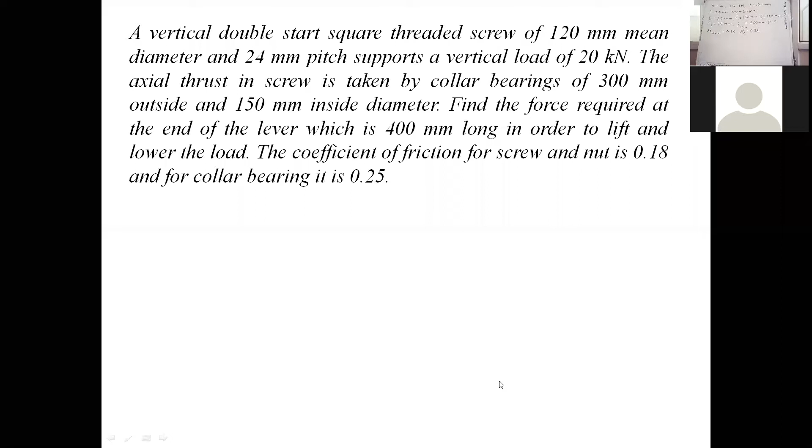So this is the statement of the problem. Now based on this, we'll try to find the force required at the end of the lever, so the effort. Whatever given data is there, I have written it on the board. Let me stop this sharing and go to the board.

So in front of you, you'll find the data. Can you able to see this? Yes, sir.

In front of you, the statement is: a vertical double start square thread, that's why we have written n equal to 2. Mean diameter is 120 mm, 24 mm pitch is given, W is the load 20 kilonewton, D1 is 300 mm, so the collar dimensions are given.

So D1 is 300, that means R1 is 150 mm. D2 is 150 mm, that means the inside diameter of our collar, so R2 becomes 75 mm. Length of the lever is 400 mm.

We have to find the effort or the load at the end of the lever. The coefficient of friction of screw is 0.18 and the coefficient of friction of collar is 0.25. So this is the given thing.

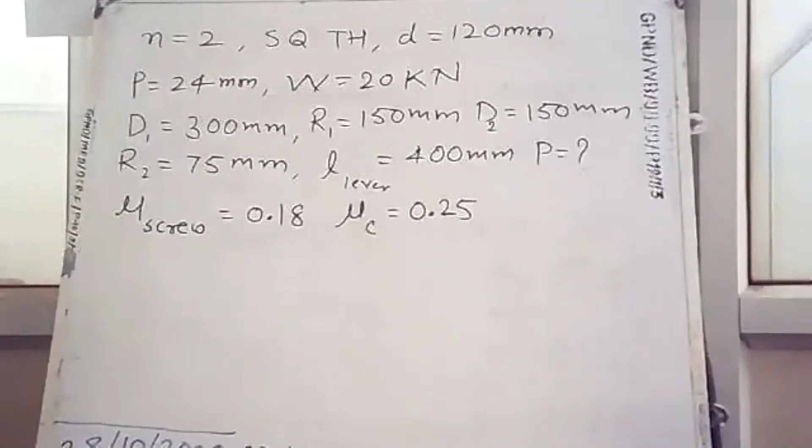So from the given thing, we have to find the effort required first, so effort at the end of the lever.

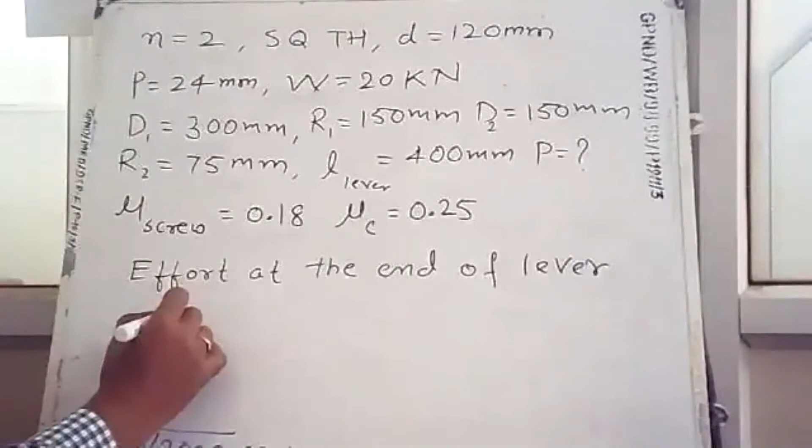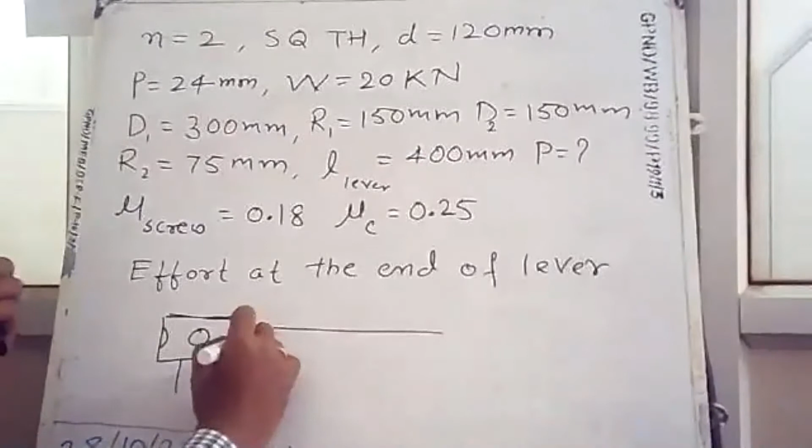We know that in our power screw, this is our screw. The screw has holes like this, and here is the lever. So we can put this lever inside this hole so that we can rotate it and lift the load.

Now to rotate this, we need effort here. Here we need an effort, and the length of that lever is given as 400 mm. So here is the effort P.

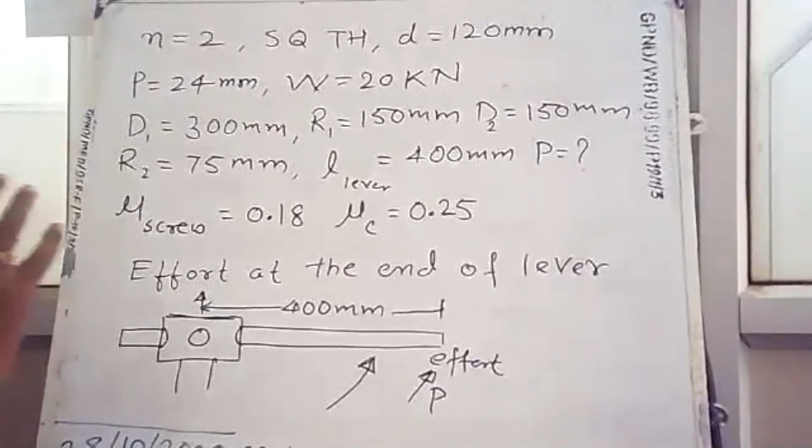This effort P, which is acting at 400 mm length of the lever, creates torque. So this is the torque created by the effort, which is equal to P into the length of the lever. This much amount of torque is created because of this effort.

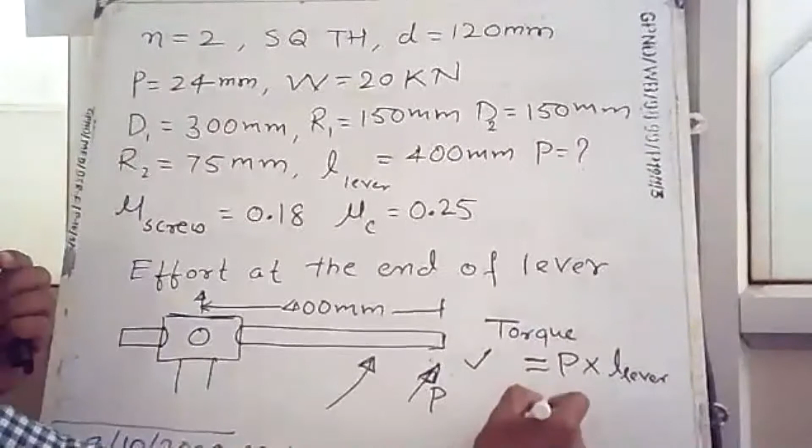This torque is equated to the total torque which overcomes our screw friction and collar friction. Already in our last lecture, we have seen how to find torque to overcome screw friction and torque to overcome collar friction. So we have to equate P, which is the final answer we want, multiplied by 400, with the torque which overcomes the screw friction, and the torque which overcomes the collar friction. So this is the effort that we have to find.

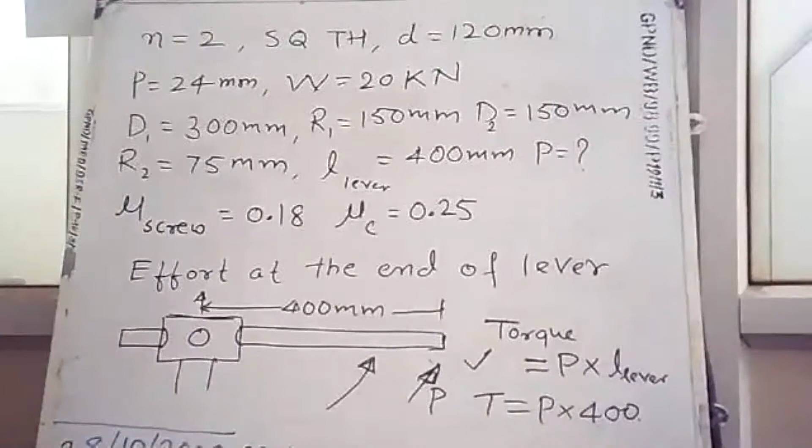Now from the given data, we have to find torque first. So let us go further.

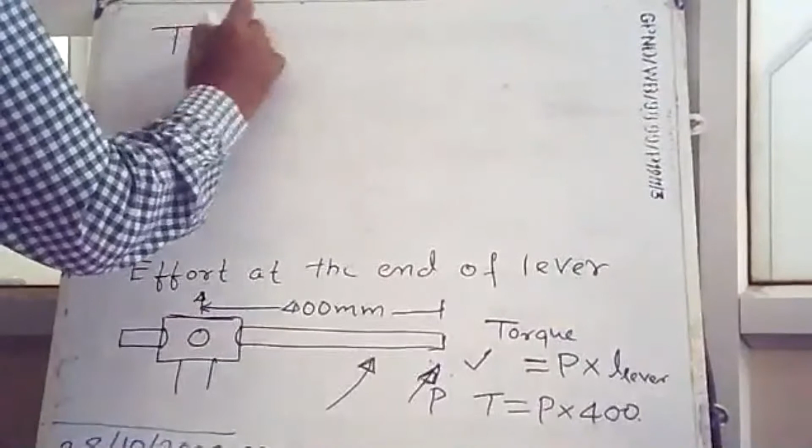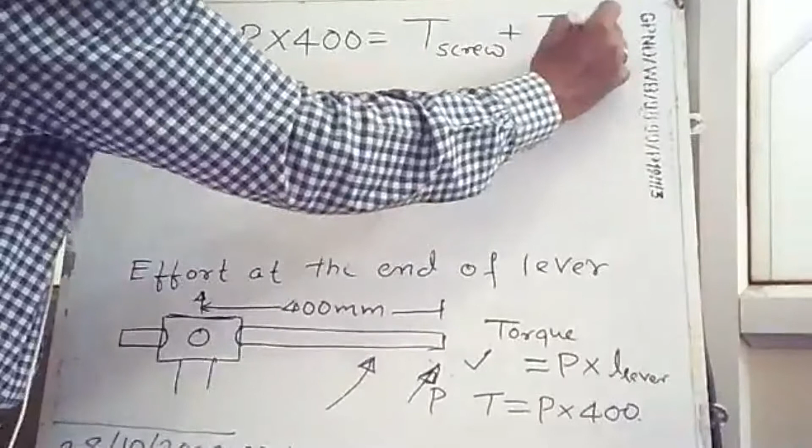Now here, the effort required at the end of the lever gives torque T, which is equal to P into 400. This should be equated with torque because of the screw plus torque because of the collar.

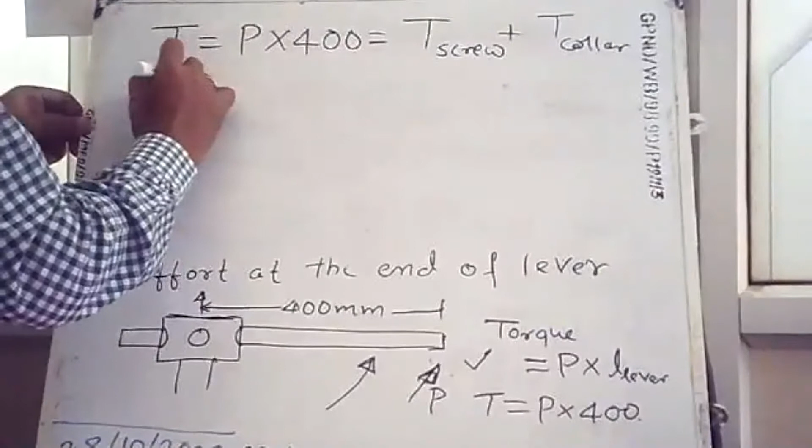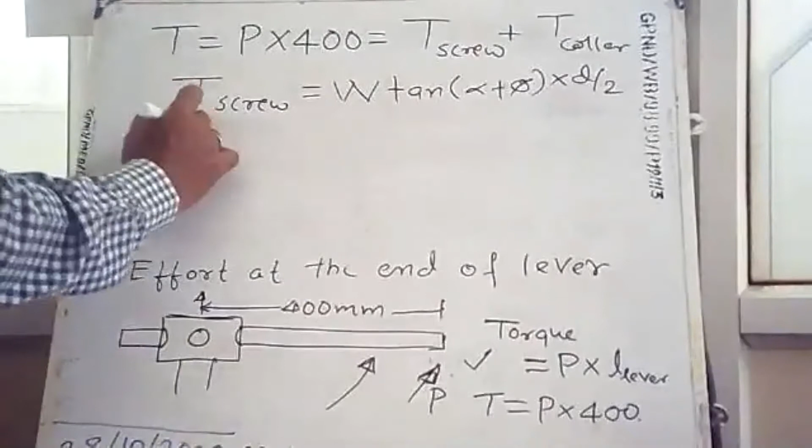Now we know that torque because of the screw can be found using the relationship W tan of alpha plus phi, into d by 2. And collar friction can be found like this: mu c, W, and R, where R is the mean radius. In this equation, we already know W, which is given as 20 kilonewton.

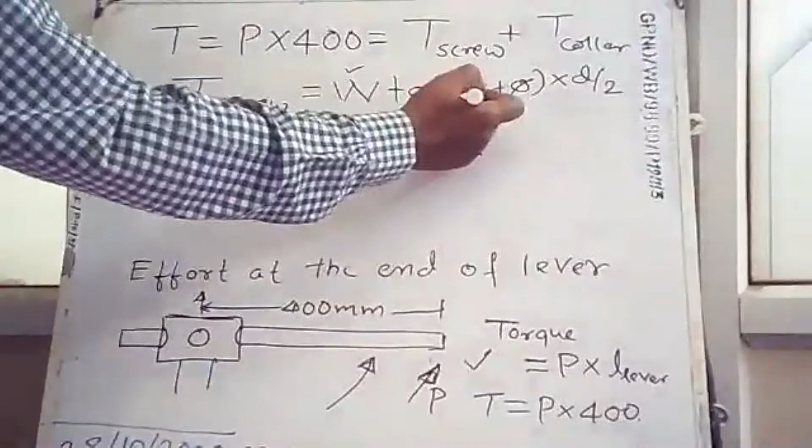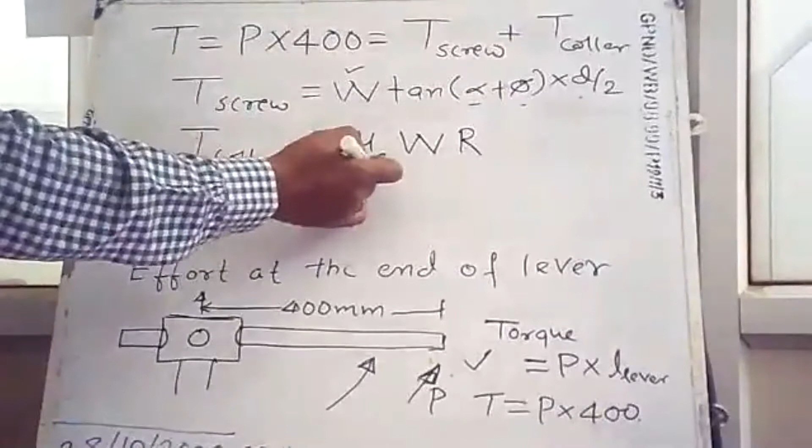Here, alpha and phi we have to find. D, the mean diameter, which is equal to 120 mm, is given. Also mu c is given, W is given, and R we have to find. So the main thing is we must first find alpha and phi.

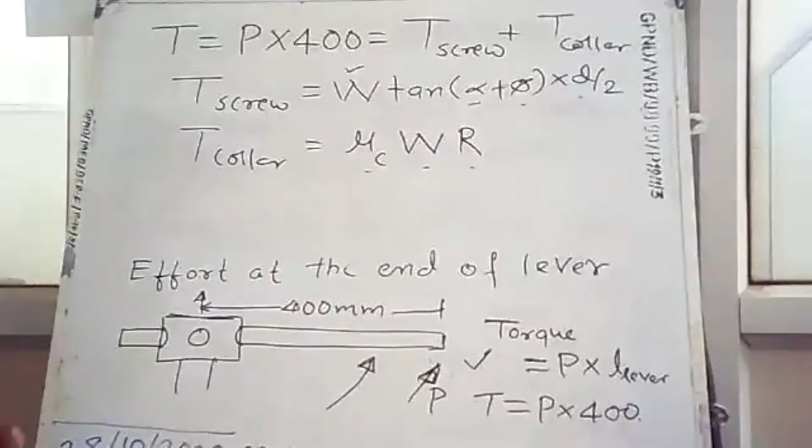So we'll try to get that. Now keep your calculators ready, because I'm going to ask you the calculation of alpha and phi.

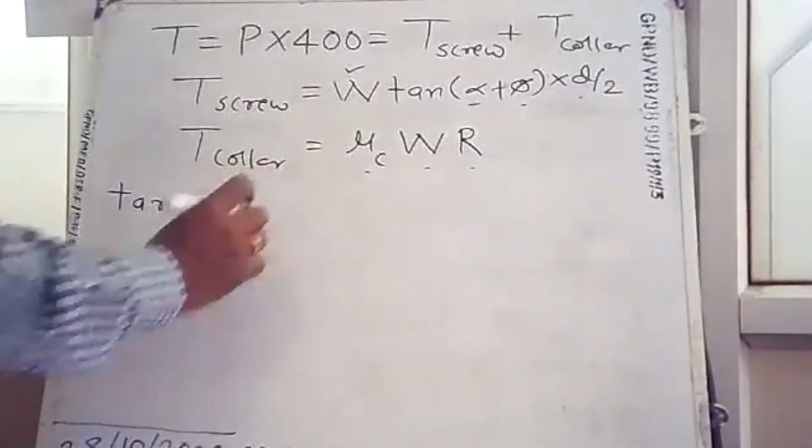Okay, so the first thing is how to find phi, because phi is the friction angle. We know that tan of phi is equal to mu. This is the mu for the screw, and mu for the screw is given as 0.18.

Let us go for calculation of alpha. Tan of alpha equals to... now here it is given that it is a double start thread, so that's why there is lead divided by pi d, which means n times p divided by pi d.

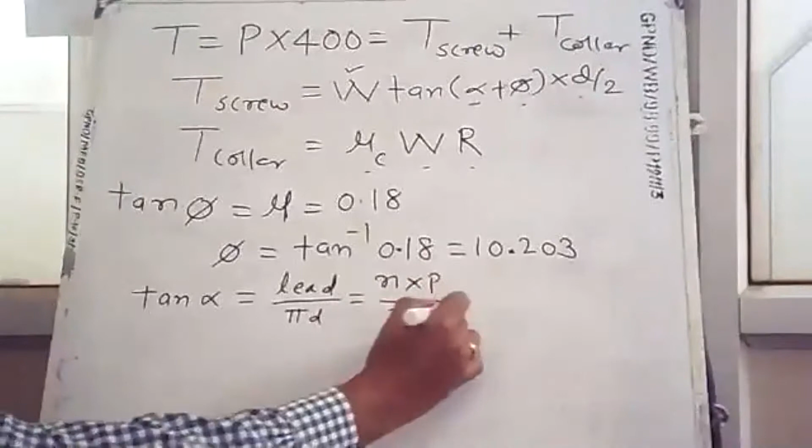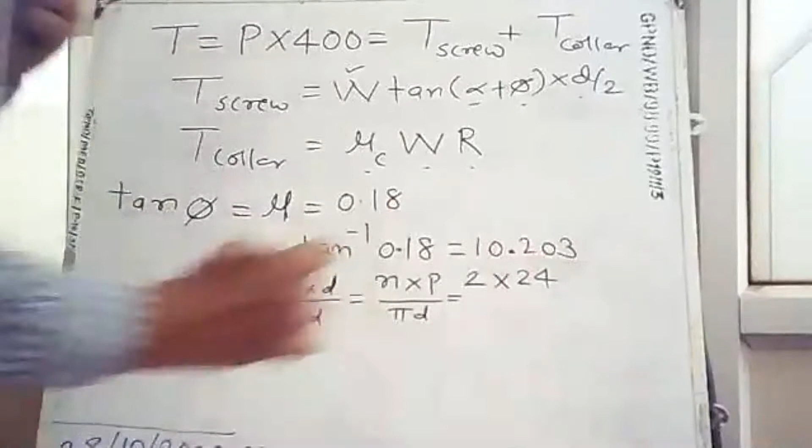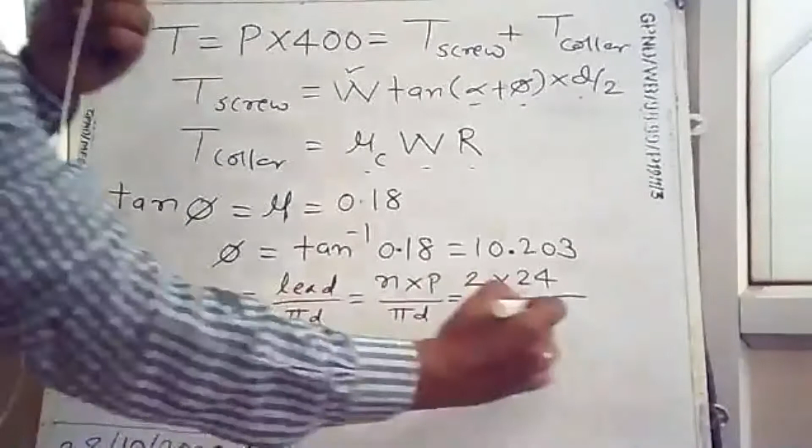Here n is 2, because double start means 2. Double start multiply by pitch, which is given as 24, divided by pi into the mean diameter. The mean diameter is 120 mm given.

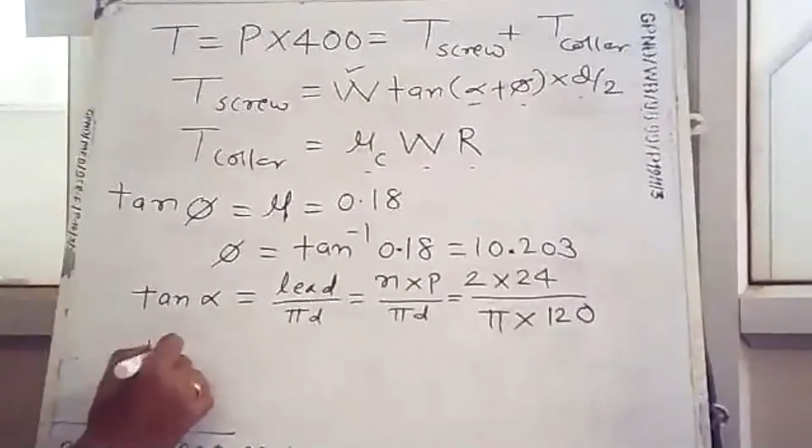From this you find the value of tan of alpha first. Tan of alpha is equal to... you do this calculation and tell me how much is tan of alpha. 0.127.

0.127, okay. If it is 0.127, take inverse of that. So tan inverse of 0.127. Alpha that comes out is 7.256, so we'll take 7.25.

So here we have both angles. Phi we have calculated as 10.2 and alpha equal to 7.25. So these two values are with us. D also known, W also known.

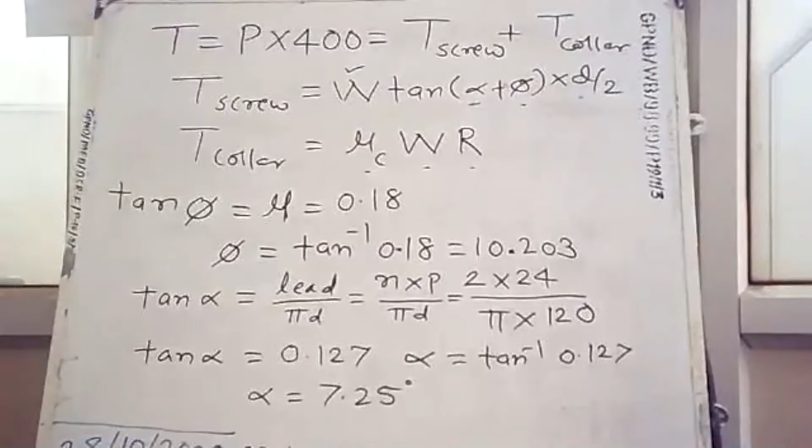Then we can find the first torque required to overcome the screw friction. So I'll make it here. I think already we have taken this. So we know the value of phi and alpha.

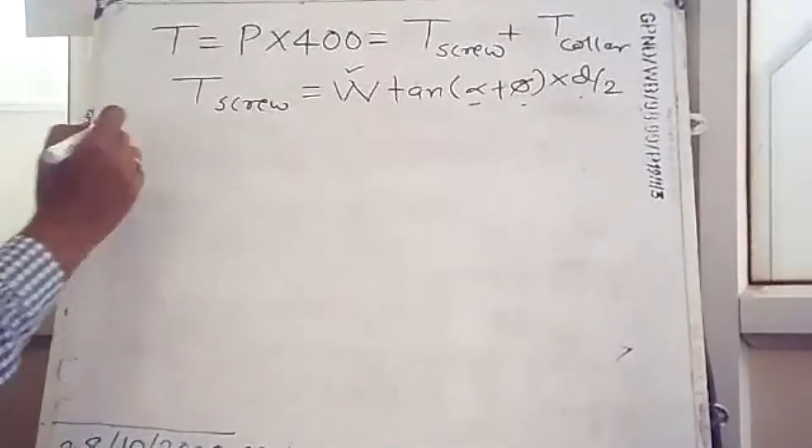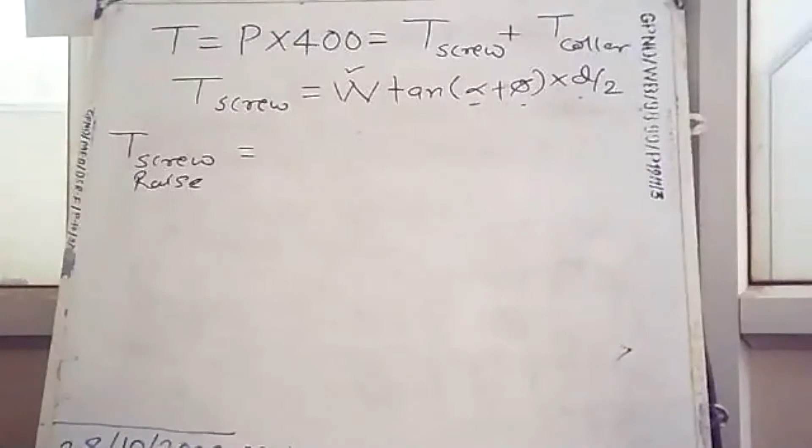Now, amount of screw friction to raise the load equals to... now how much is the W? W is 20 kilonewton, so 20 into 10 power 3 is the load required.

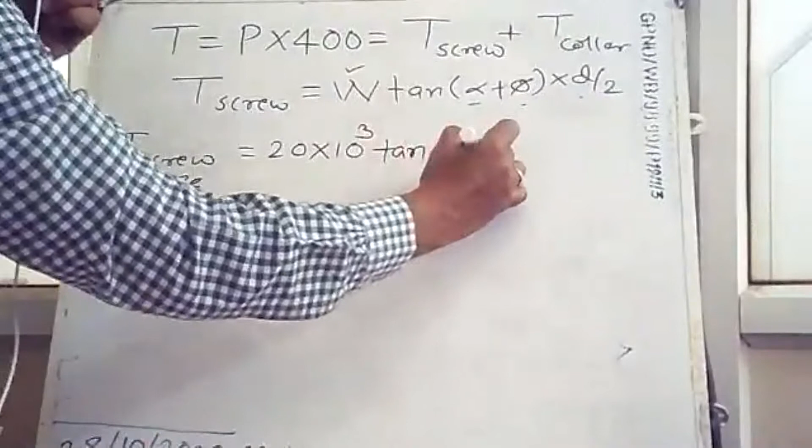Into tan of... now we know the values, so I think 7.25 plus 10.2, where 10.2 is the phi value, multiply by d by 2. D by 2 means 120 divided by 2.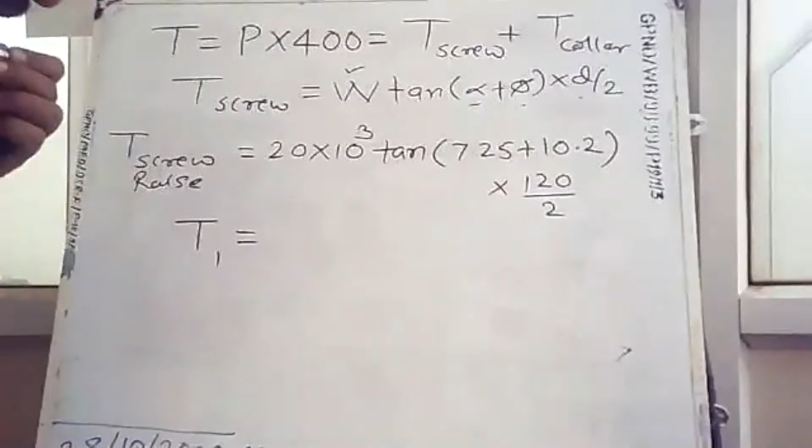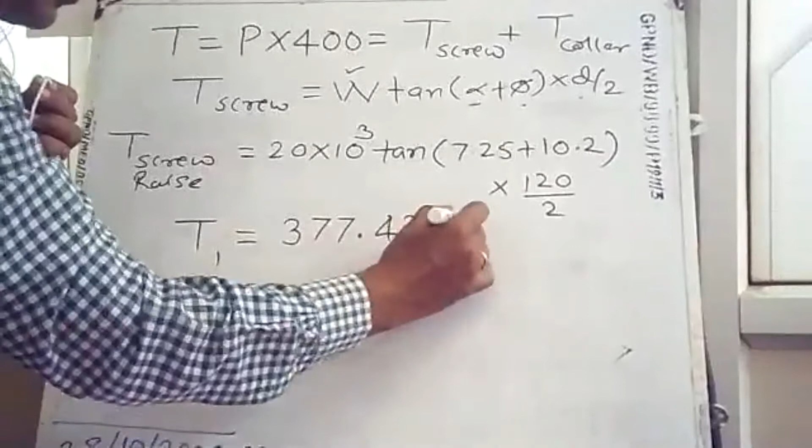Here the T1 is known by using our calculation. Second is torque for collar. There is a collar also there.

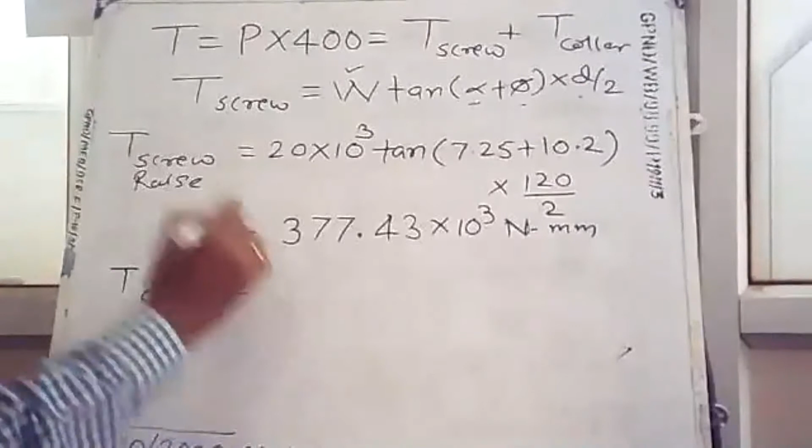So that torque required to overcome the collar friction can be found by using our relationship mu c, W, and R. R is nothing but the mean radius of the collar, because R1 and R2 is given here, the diameters are given. So we can say that R1 plus R2 divided by 2.

Now you find this T2. We set collar friction as second, T2. So T2 equals to... what is the coefficient of friction given for the collar friction? I think 0.25, into now the load is same, 20 into 10 power of 3, multiply by...

Now here the radius are also given because diameters are given. Diameters are 300 and 150 given. So here I'll put that 150 plus 75, radius divided by 2.

Okay, so this gives us T2. Tell me how much is T2, the collar friction? 562.5 into 10 to the power 3.

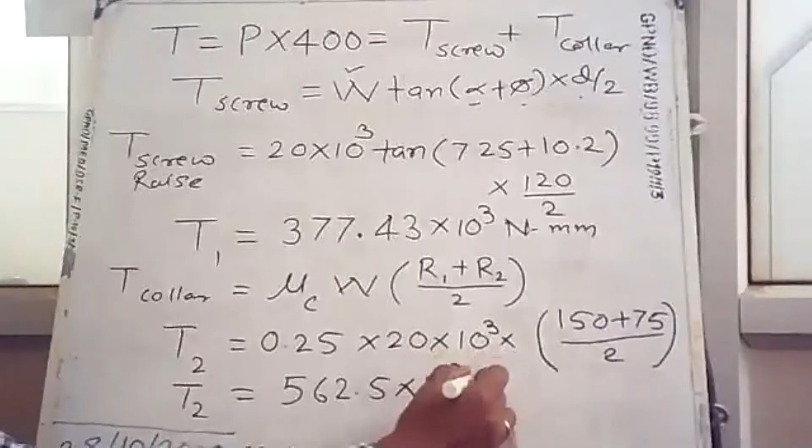Someone tell me. Hello sir, someone tell me. 562.5 into 10 raised to power 3, Newton mm.

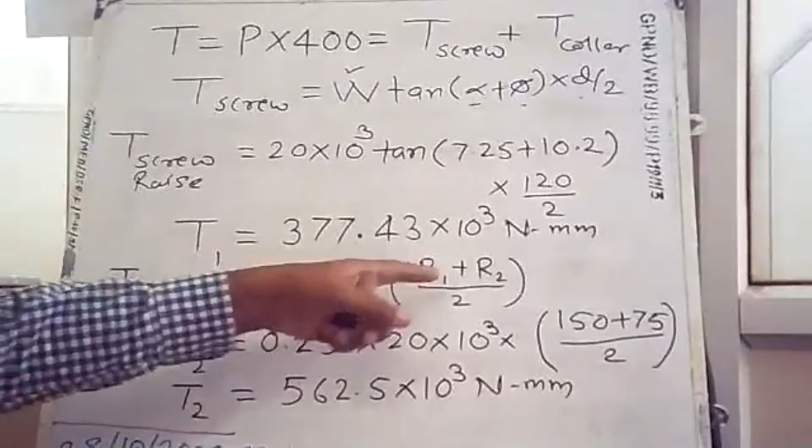Okay, now we have both torques, T1 and T2, for screw and collar. If you put T1 and T2 here and equate that with this, then we can find the P value.

So let us go further. I'll put that value here.

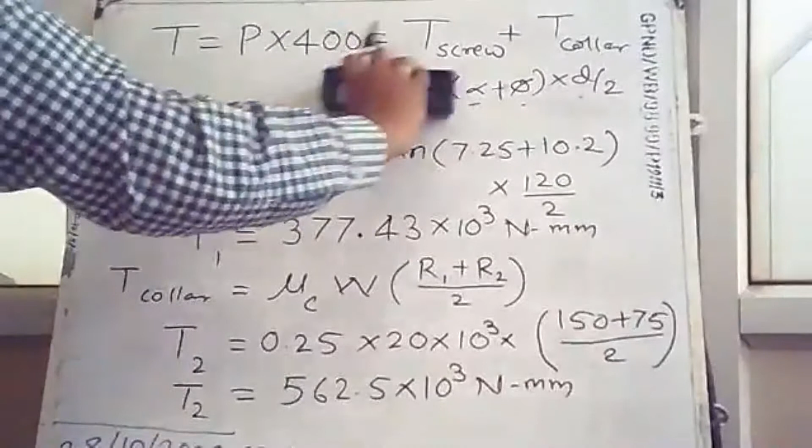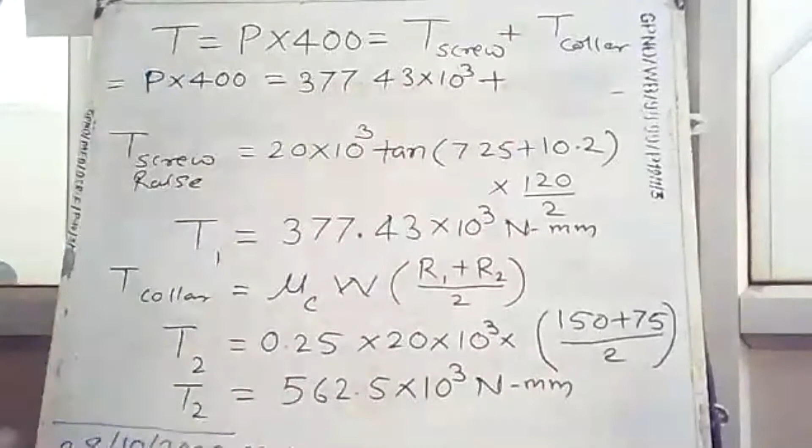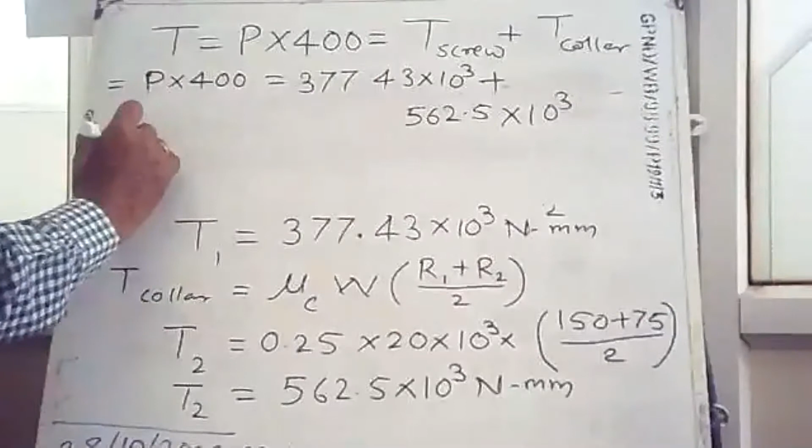So take this T1 and T2, or collar and screw friction here. So finally, P into 400 equals to the first value, 377.43 into 10 power of 3, plus the second value, 562.5 into 10 power of 3. So we added both the torque and equated that to effort. So effort required, finally we got effort required to raise the load.

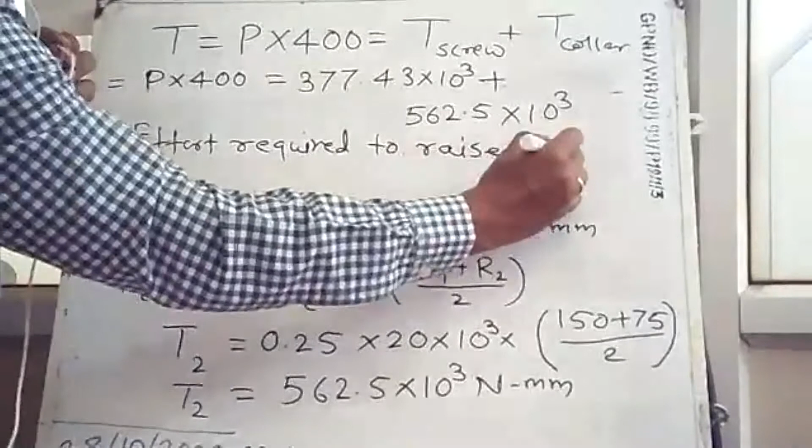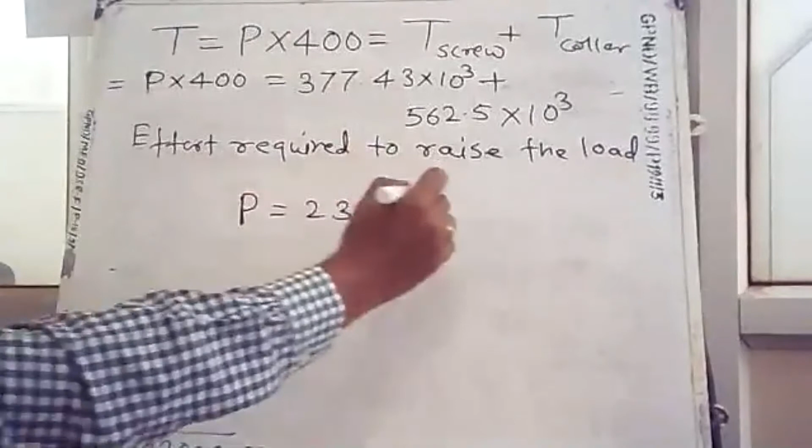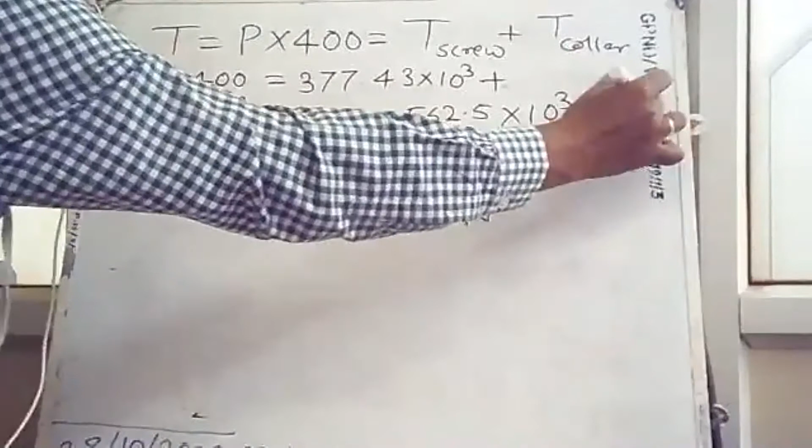So that we can find here. So you tell me, how much is the effort here? 2349.8. So P equal to 2349.8. What should be the unit? Newton. Yes, Newton, because here already 400 mm is there, so that mm and here is also Newton mm. So that Newton mm, that mm gets cancelled, so remaining is Newton only. So 2349.8 Newton is the exact effort required to raise the load.

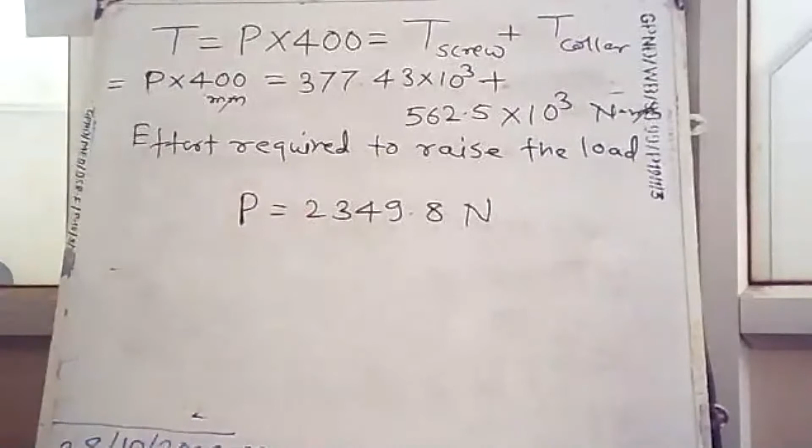Okay, so this is one thing. Now here, one more thing is asked: how much amount of effort is required to lower the load? Okay, so again, let us go for effort required to lower the load.

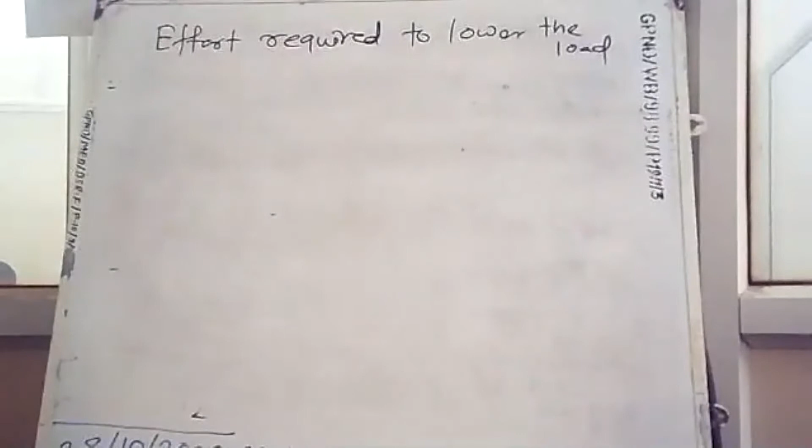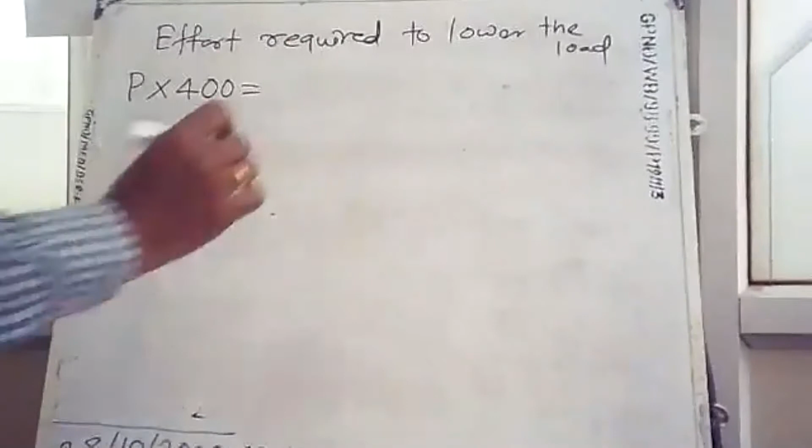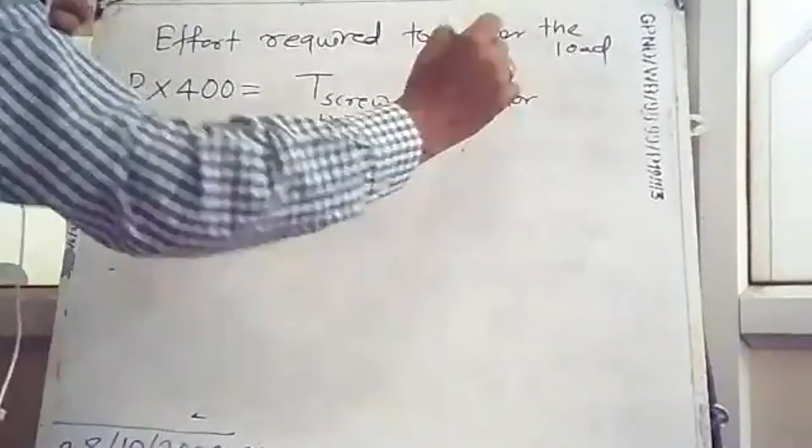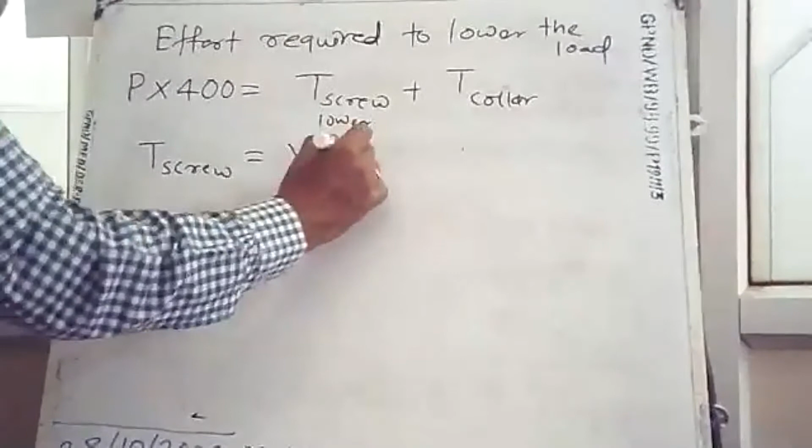I will erase this. Now, effort required to lower the load. Okay, effort required to lower the load. So how we can find that? By the same thing: P effort multiplied by 400 equals to, okay, the screw friction to lower the load plus collar friction. Okay, plus collar friction. Now the screw friction to lower the load is equal to W tan of phi minus alpha into d by 2. So this is the only change.

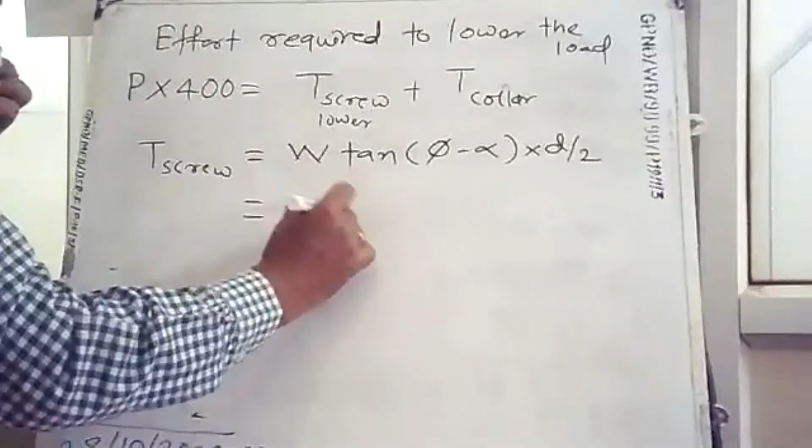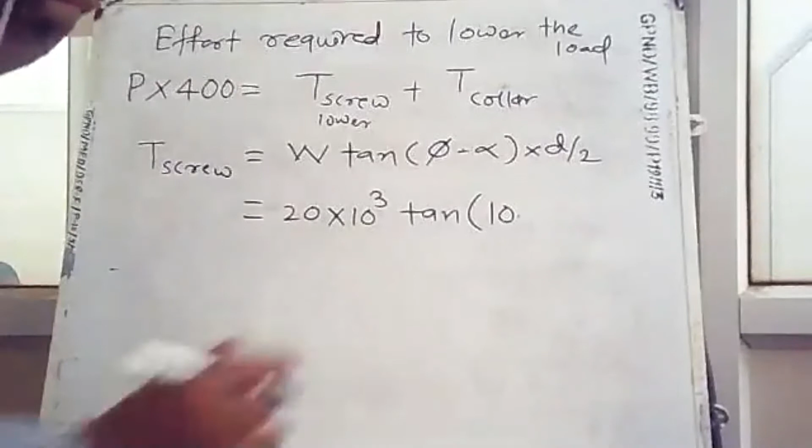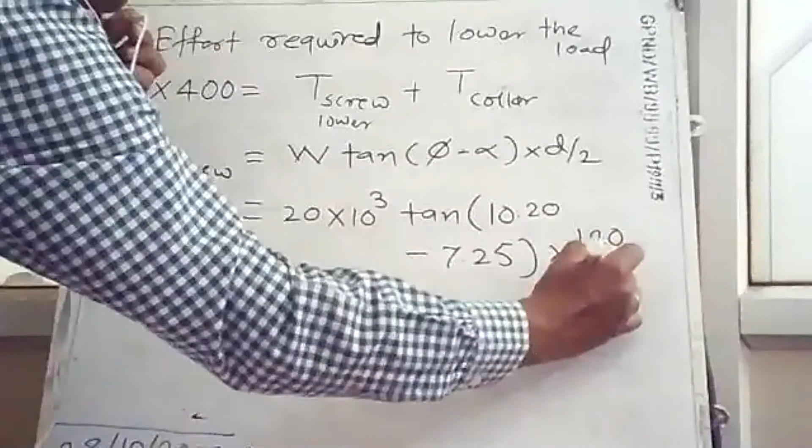There is no change in any collar friction because collar friction is same. Now here I will write 20 into 10 power of 3, tan of 10.20 minus 7.25, into 120 by 2. So you tell me, one more torque required to lower the load. 61.83 into 10 to the power of 3 Newton mm.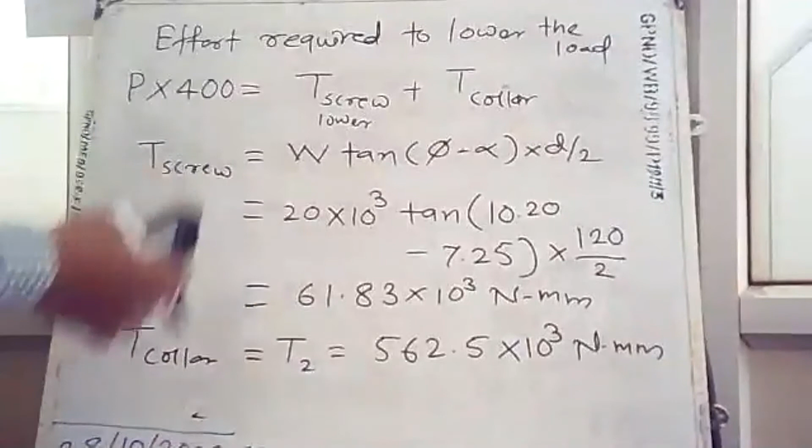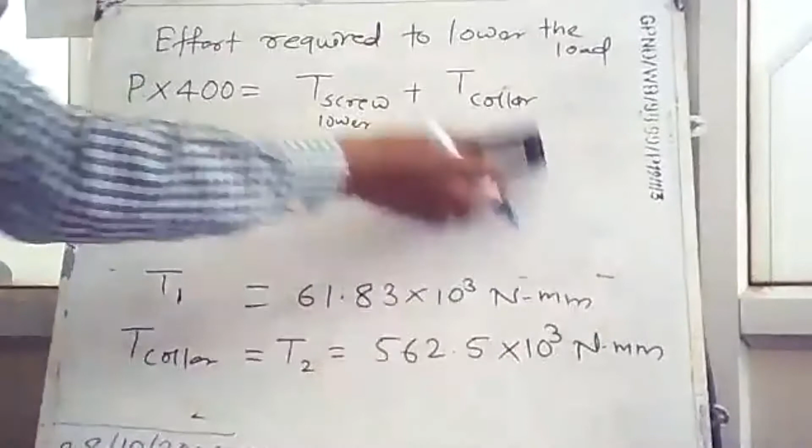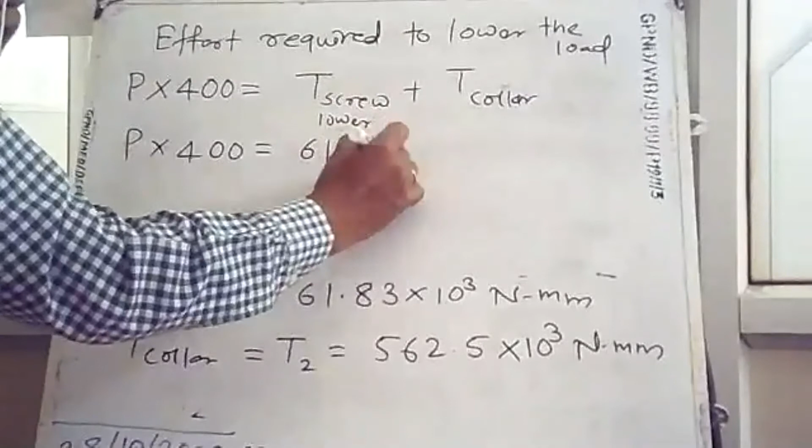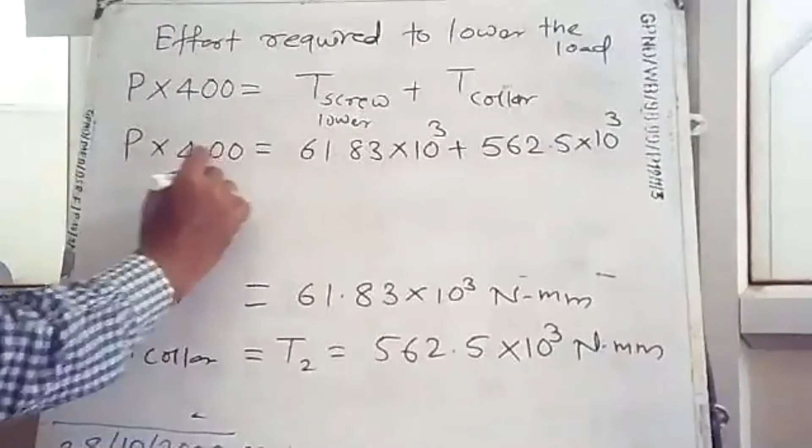We'll take that value here and we'll try to get the new value. So I'll put these two values, T1 and T2, in this equation, the screw friction and collar friction to lower the load. So you put these values here. So effort required to lower the load, P into 400 equals to 61.83 into 10 power of 3, plus 562.5 into 10 power of 3. So again, effort required to lower the load, P lower equal to, how much is the effort?

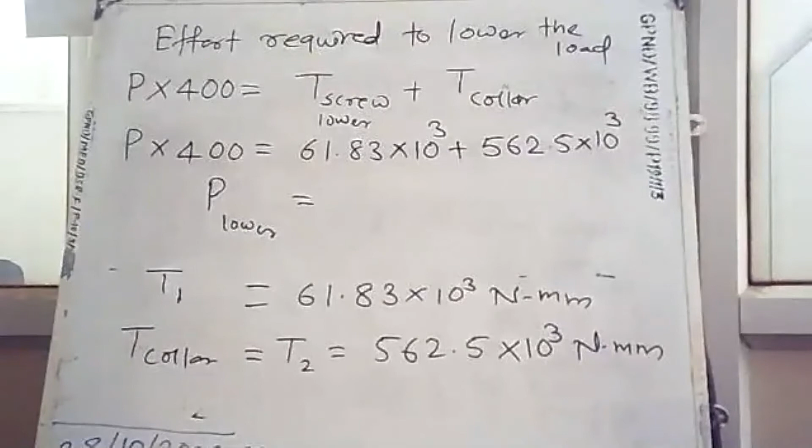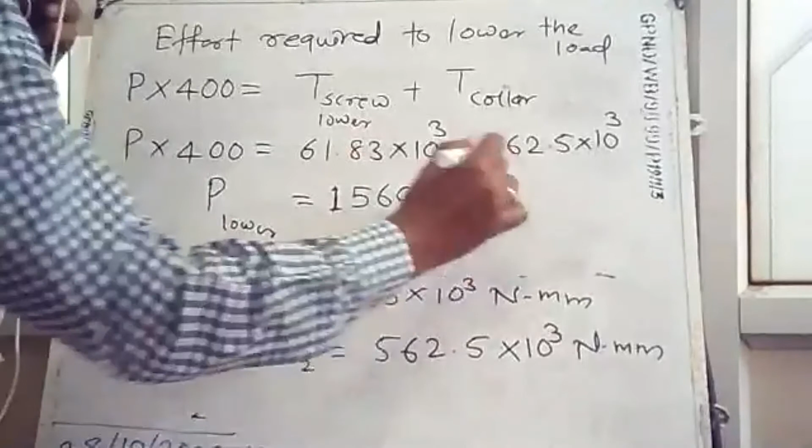1560.8. 1560.8 Newton. Yes, so this completes our problem.

This is asked in one of our previous question papers. This is asked for almost 8 marks, because this is asked in the G scheme question paper. So this is all about our simple numerical based on this.